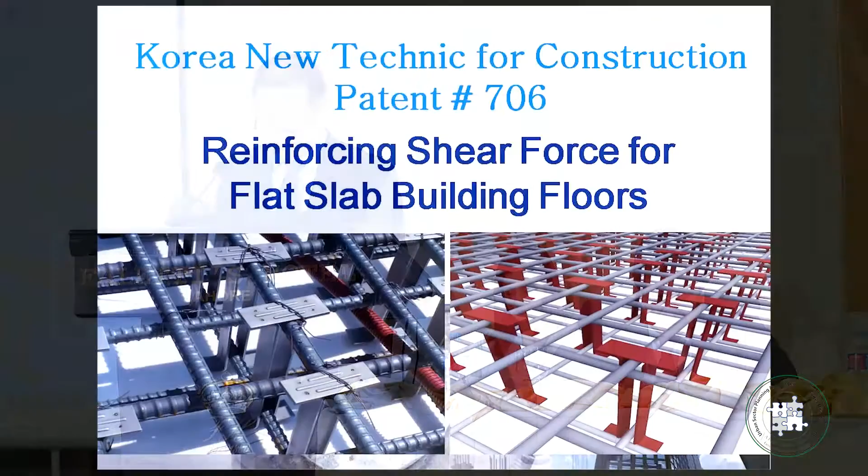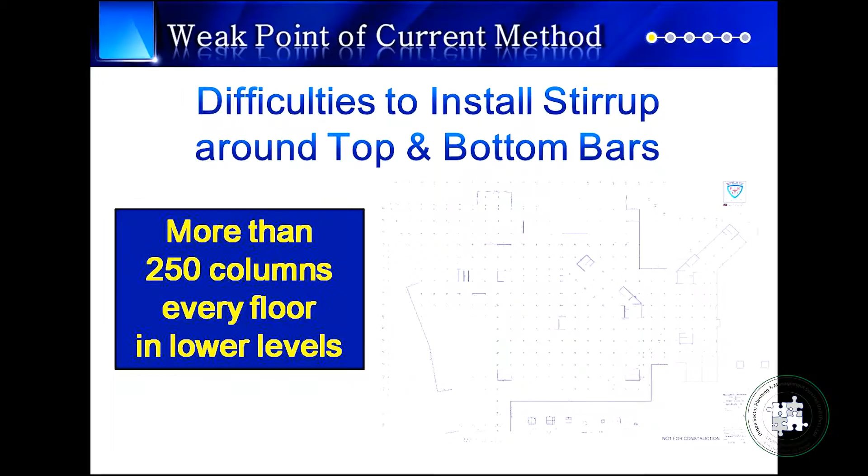The technique, registered number 706 in Korea, is for reinforcing shearing forces of the flat slab system of the building. In this PKLI project, we have a flat slab system construction for floors, and the problem is that we have more than 250 columns on every floor. It's a huge building, so it takes lots of time.

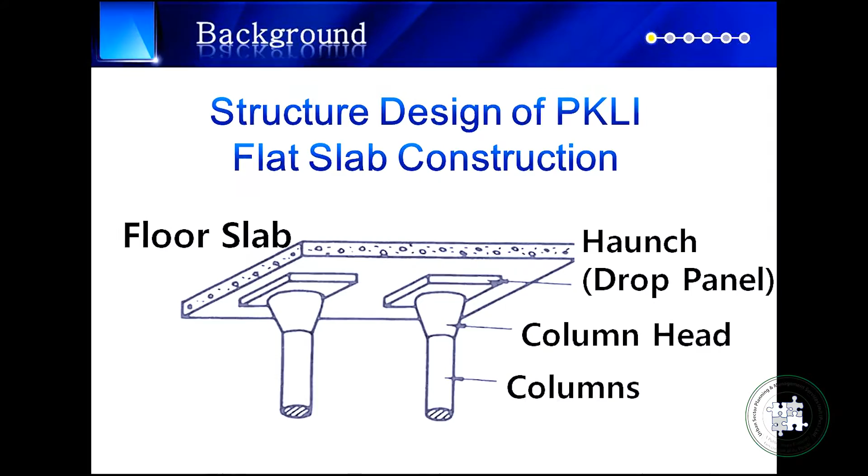This flat slab system is composed of columns and column heads, and on top of that we have drop panels, sometimes called haunches, and on top of that we have floor slabs.

The benefit of this structure system is that there are no beams and girders under the slab. This means we can have more space, and the height under the slab can be utilized for the function of the rooms.

This flat system works like this: shearing forces in the center of the area push down in one direction by load on the slab. Then at the other end, on column areas, forces push upward in the opposite direction. In these circumstances, the problem is that cracks or tears may occur on the structure.

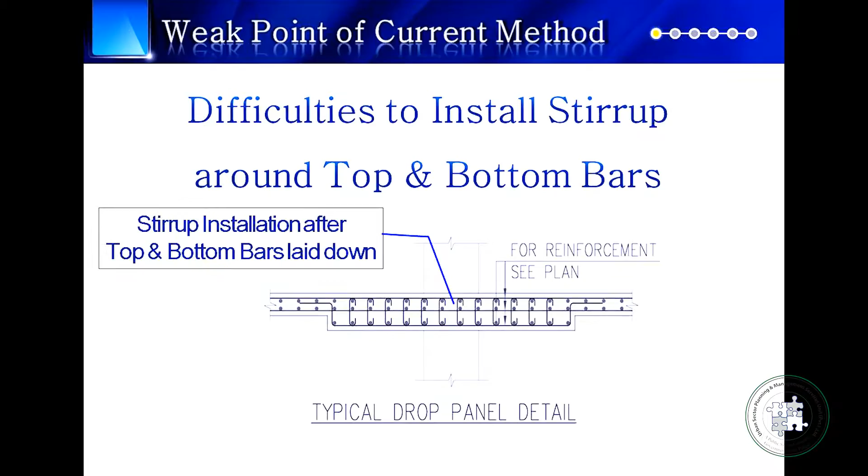Therefore, on this flat slab system, sometimes columns puncturing the slab may occur if the reinforcing steel bars are not accurately installed. The steel bar reinforcing work is critical to assure the strength of the gray structure of the building.

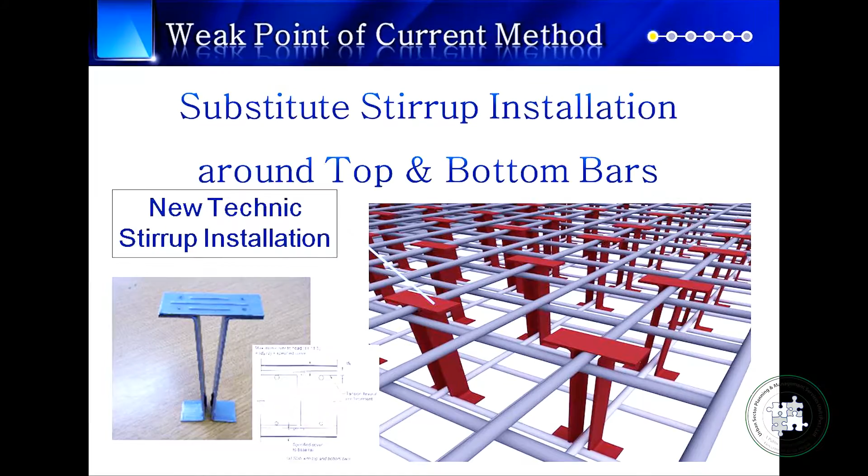But reality does not allow easy work on this system. We face the same difficulties during construction all the time. These minor works, such as installation of stirrups - what the stirrup means, it's like a small piece of steel bar to fix and hold the steel bars in the structure, sometimes rectangular type, sometimes U-shaped. It depends on the design, but the stirrups always perform very critical functions in the structures. So installation of the stirrup itself, after the bottom and top steel bars are laid, is not an easy job.

As you see, like U-shaped stirrups - you can imagine how we can install the stirrups after the steel bar is laid horizontally and longitudinally, because we have to fix the top and bottom steel bars with the stirrup around the bars. So actually, it's not easy.

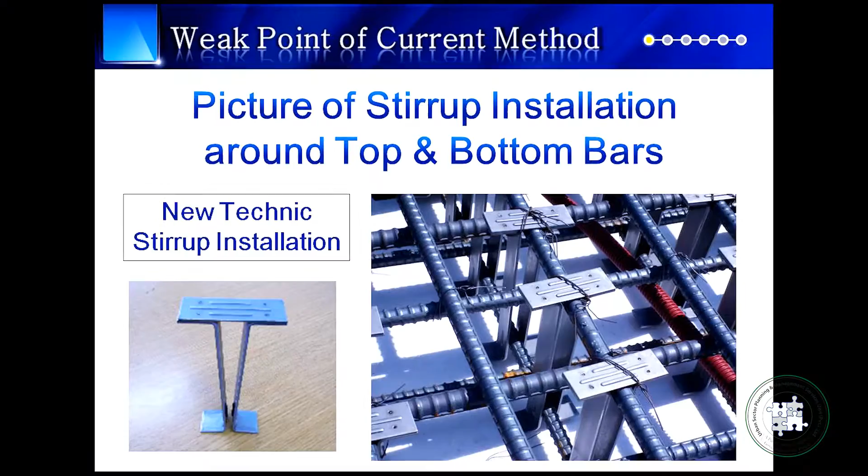So we install the steel bar top and bottom, put the stirrup around it, then adjust the distance and fix it, tying with wires. It takes a very long time, and sometimes the workers don't like it. So that's the reason we need very serious inspection on site to be sure of the proper installation of these stirrups.

The reason I'm insisting that this kind of system should be carefully handled - as I mentioned, in this system there might be columns puncturing the slabs. That means the slab just goes down.

Actually, it happened in Korea about 20 years back - 500 lives were lost in one building collapse accident. It was a big department store which had a similar system of flat slab concrete. The main reason, it was proven, came from the bad quality of stirrup installation. So this means stirrup installation can destroy the whole structure.

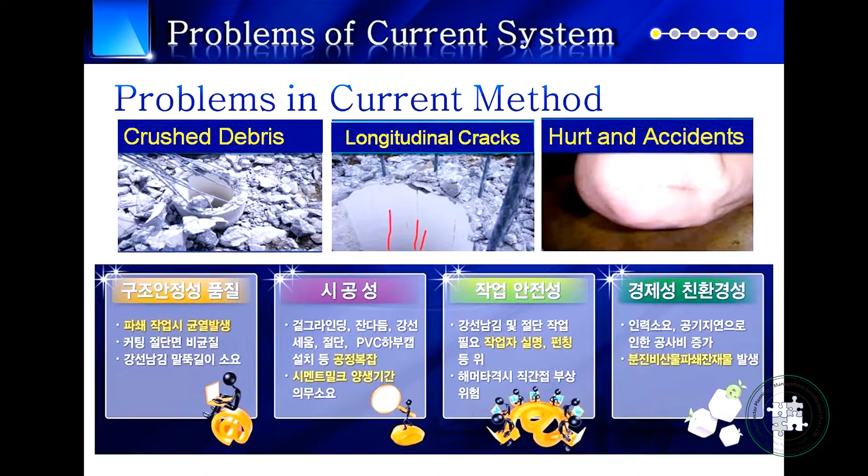The foundation will go down, settle. And in case of a seismic situation, even the foundation can be shifted, causing big damage to the building itself. So the reason we are concentrating on foundation works is that the foundation holds everything for the building. Under the foundation we have the pile system, so the pile head should be managed and quality controlled very carefully from the beginning to ensure the quality of the building itself.

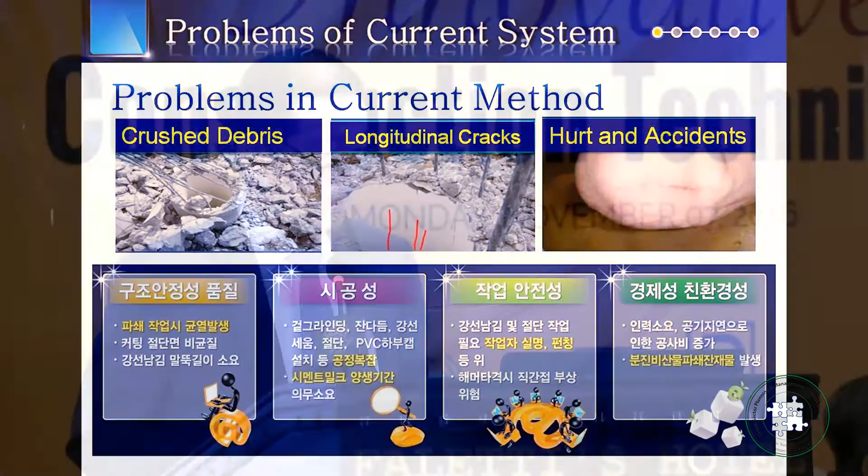The bad quality of pile head arrangement shown here will definitely bring the same result. During installation, the pile head arrangement of conventional systems on site shows problems like crushed debris and always longitudinal cracks in the pile body. Because of the situation and work environment, workers always get hurt, scratches, and sometimes unrecoverable damage happens. So we have to do something to improve the work environment.

Especially without proper tools for the pile head arrangement, it's clear that workers would get hurt and damaged. The purpose of this system is to provide improvements - some of this is written in Korean, but I hope you could read some of it.

So always the same thing: the purpose of the system is safety, workability, structure strength, cost, and time. Even if you don't read the Korean, it's the same - structure strength, time, cost saving, and safety. If it's not proved, the system cannot be endorsed by the government. So with this system, the same way, we can get structural safety, workability, and cost savings.

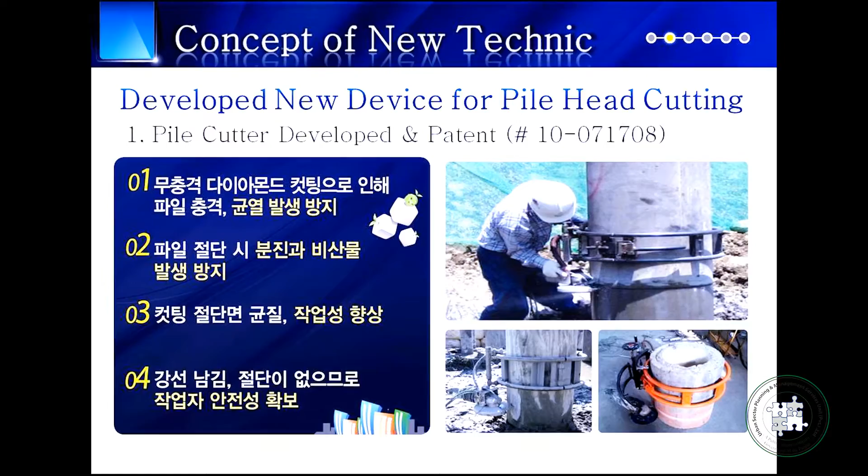So through this development of new techniques, number one is the new device and tools developed for pile head cutting. This new device itself also got endorsement from the government at the same time. The tool can bring results such as no cracks on the pile body, no dust, no debris, safety for workers, and improved workability.

So in this system, we use this new assembly system designed in the factory. This product can be pre-assembled in a factory - no, not even a factory, just on-site, if we have some space to assemble this kind of system. Then it's installed on-site very easily.

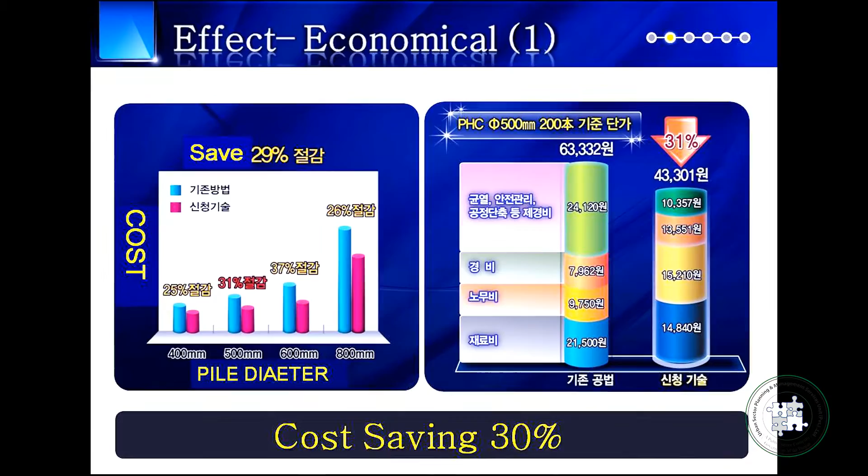So all this in Korean, the same thing. This system can be installed very easily. So you will be surprised that when we use this system, we save lots of time for foundation works. We saved almost 30% of cost for foundation work itself. So if you have any experience in building construction, the foundation work is the most important and time-consuming period during the whole procedure. So if we can save time and cost in foundation works, inshallah, it's a successful project.

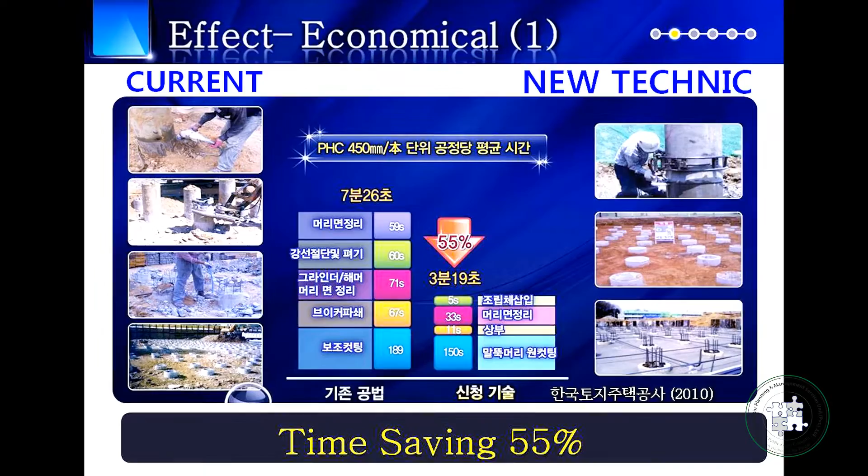When we use this system, we tested with a 450 millimeter pile. When we do the pile head cutting and arrangement with the conventional system, it takes around 7 minutes 26 seconds. But if we use this new tool and new system, it takes just 3 minutes 19 seconds. So this simple comparison shows around 55% time saving. So we have to calculate the overall time period and the construction cost itself, but still we are sure that we can save more than 50% of the time.

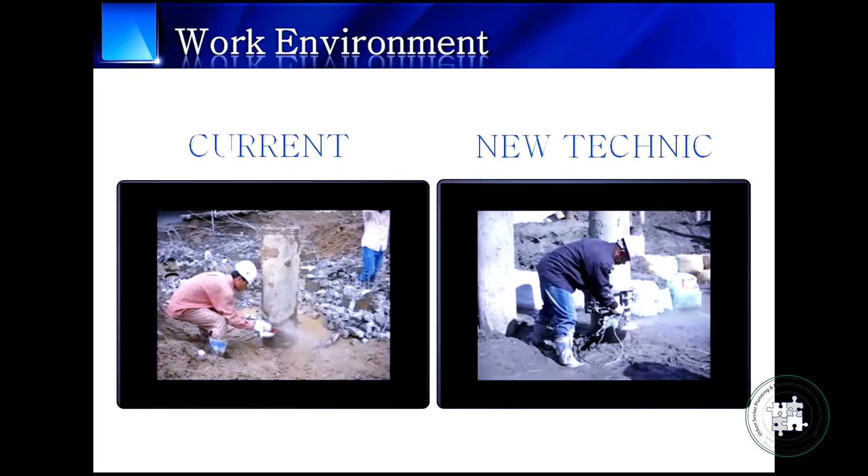You can see the pictures here. The left side is the current conventional system. When we cut the pile head, we cut it with a concrete saw, whatever it is, then crush the head with big construction machines like crushers. That's the reason we always have debris and concrete remains. But if we use the new technique with the new tools in the right side picture, we can change all the things.

The procedure for the current method takes around 7 steps, 35 days to finish the foundation works preparation. But for the new technique, we need just 3 steps and 15 days in a normal project. So we can save almost 20 days. So it's a big benefit for building construction if we use this PHC pile for the foundation work.

So to get this system endorsed by the government, we went through very thorough test and evaluation procedures with the specialized institute, engineers and specialists. So we did all the sample tests, and we made the real environment conditions to test the real thing, and we also did computer simulation to get the proper result of the system. All of these procedures and tests are monitored, managed and controlled by the government body. So we can be sure that the quality is believable and applicable to the site.

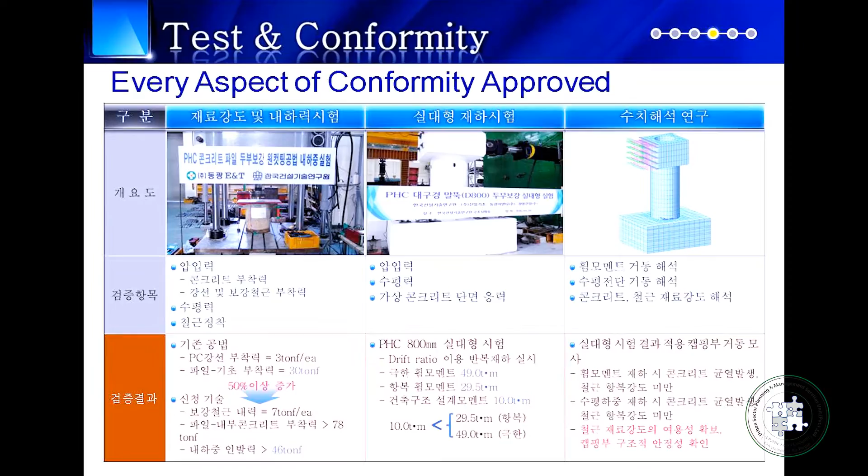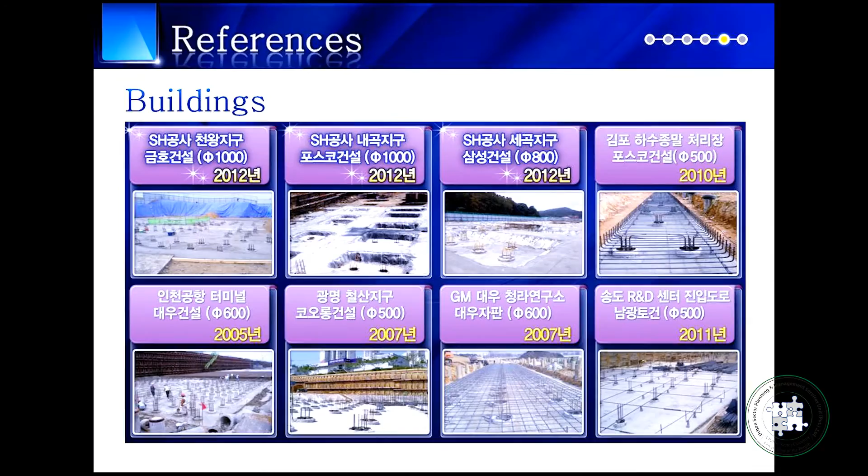So actually, I'm sorry, I lost the pages.

So in government projects, especially the public sector, lots of building construction adopted this system, like apartments, government buildings and research centers. Whatever the building works foundation, the government used this system. Also in civil works and express railway foundation works, we use this system.

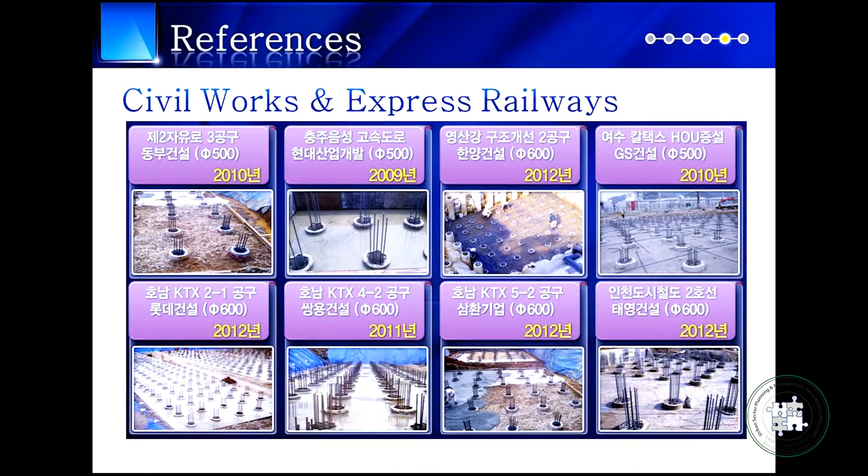So I think these two systems are very minor, as I mentioned, but still, big mega-size technology can be adopted here for innovation and improvement of the level of quality in Pakistan. But also we have to do something like these minor technologies, to save time and to improve the quality and level of technology in Pakistan, step by step.

So even these systems, I cannot use in the PKRI project. But if any building, any design can use the power-driven pile system for foundation, we can use this system also. So these two systems, for stirrup reinforcing and the PHC pile head arrangement system, can be a part of the benefit of this seminar if you can use them in Pakistan. That's all I prepared for the seminar today.